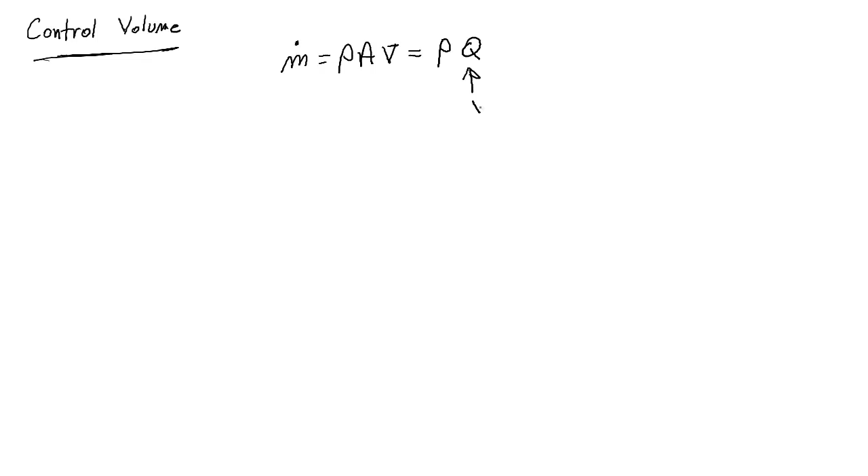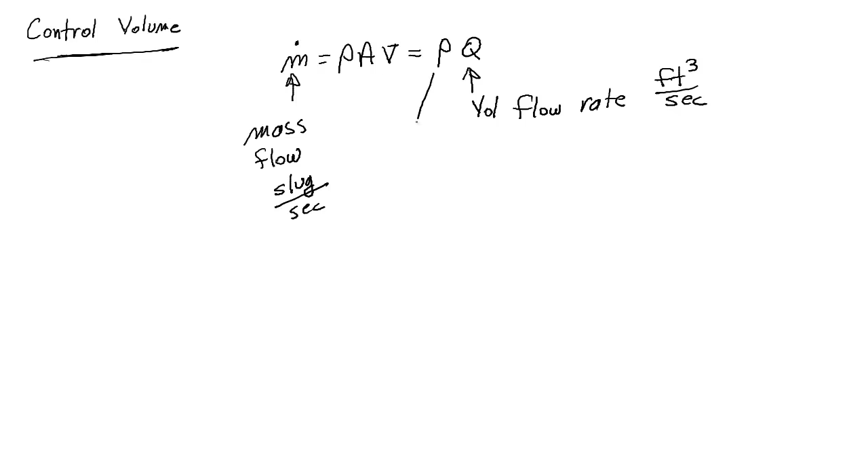So you've already become familiar with m dot is equal to rho AV or rho Q, where this is the volumetric flow rate in cubic feet per second or something of that nature. This is the mass flow rate, and in this particular case, it'd be slugs per second. And of course, this is the density that changes. It pretty much changes the cubic feet over into the slugs on this side.

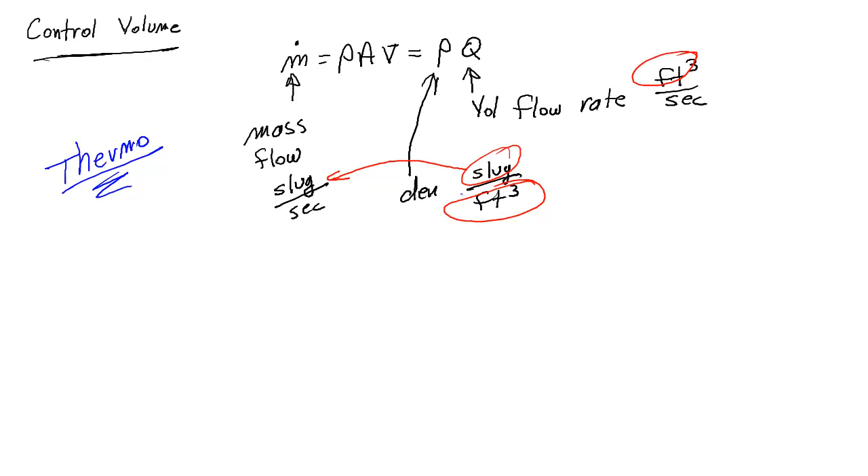You are familiar with this from thermo. And in thermo, you became familiar and you were introduced to this for a conservation. It was conservation of mass. So you were probably told mass in is equal to m dot in is equal to m dot out.

Now let's introduce it in a different way, and in this particular way, it's more mathematical. I'm going to write an equation down without deriving it, and then I'm going to give you some understanding of where it came from. I could go through the derivation, but that may not be as fruitful as trying to obtain a deeper understanding of it.

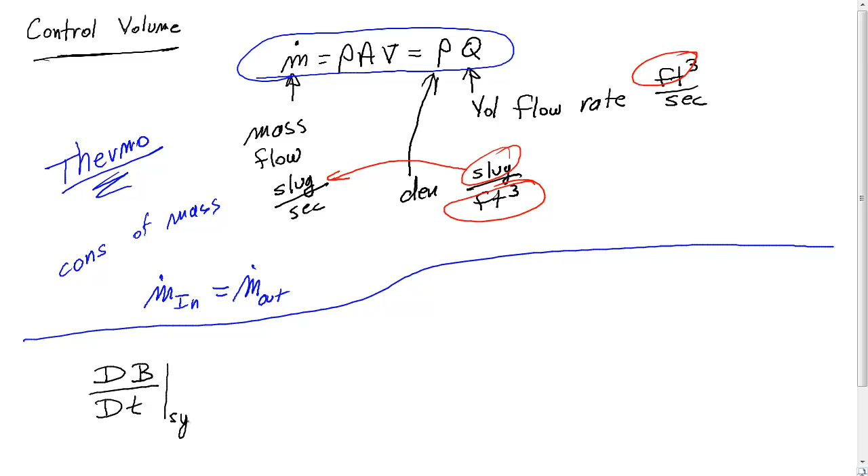Let's start this way. Okay, so let's say we have a particular quantity B, capital B, is equal to some type of quantity. In our case, the one we're going to do in the short term is the mass. And it's for a system. Now, a system is something along the lines of something where, in thermo you had a piston, and here was your system in here. What we're interested in is something different.

Okay, now this is the beta. This is actually the quantity per unit mass. And then we're going to do a closed loop around the entire control surface of rho times beta times the velocity. And it depends on the way you write this. Some textbooks write it like this, and some textbooks write it like this. But either way you do, these two are intimately tied together.

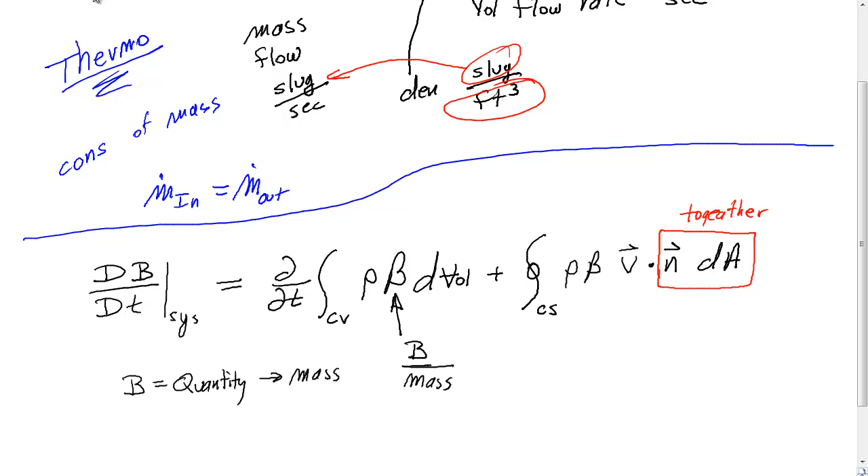Now, let's start by examining this equation. This is what commonly is called Reynolds transport theorem, and it is basically a transport of some quantity. In our case, it'll be mass, and then well, let's even forget for a moment that we're even dealing with mass. And these are the definitions.

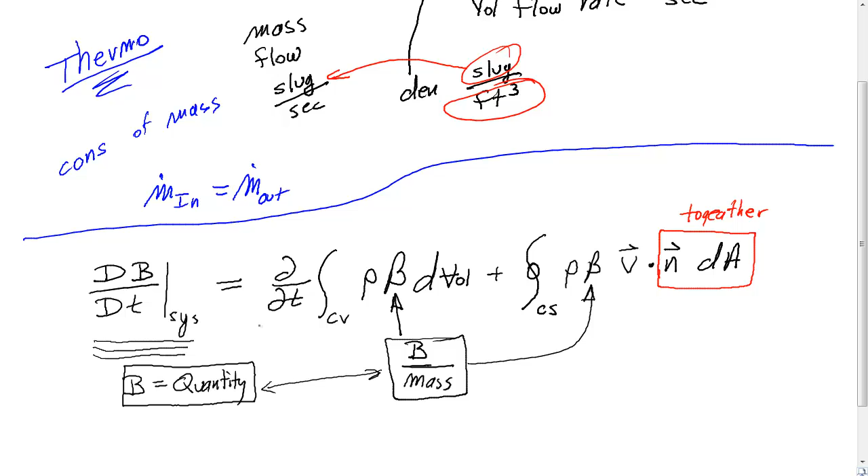This is the beta here, and so the Reynolds transport theorem states that time rate of change of some fixed system over here is equivalent to, let's stare at a particular location in the flow field and let's define a control volume, and these are the quantities through that.

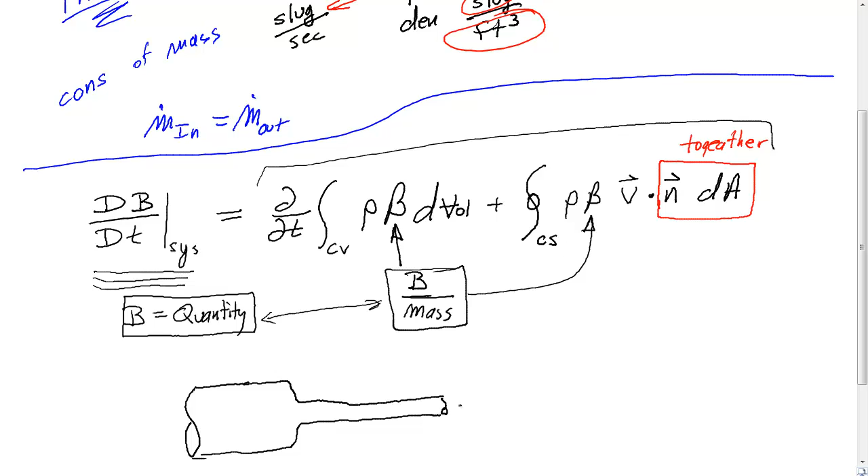Let me give you a typical example. This is probably the easiest example to come up with, and my handwriting is not steady, but that's okay. Let's say you have a particular pipe where you have flow out and flow in. You've decided to come up with what is essentially a control volume, and of course a volume has a surface.

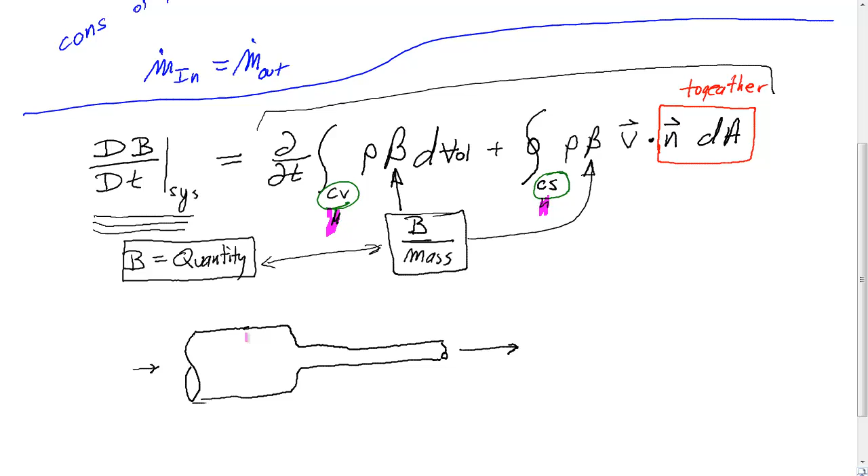So I'm going to let the green designate, or here I'll even do like this. The purple will designate the control volume. So here's the control volume I've decided. I'm going to come up. Now this is not something that you're going to saw across. This is something, or cut away from the diagram. It's something that's in your imagination.

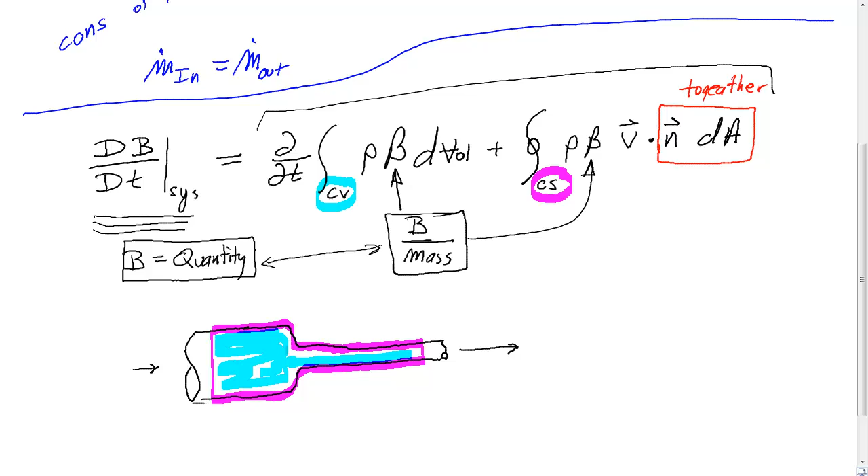You're going to stare inside of here. Let's even be a little bit more precise and say this is the control surface, and the light blue will be the volume. So I would have to color all the inside of here as being the volume. I'm not going to spend the time to make it perfect, but you get the concept.

Now, let's go specifically to our problem. We're looking at mass as being the thing we're interested in. So let's define our quantity B. It'll be M. So beta will be B divided by M, or in our case, it'll just simply be 1. So the Reynolds transport converted into our mass equation will look something like this.

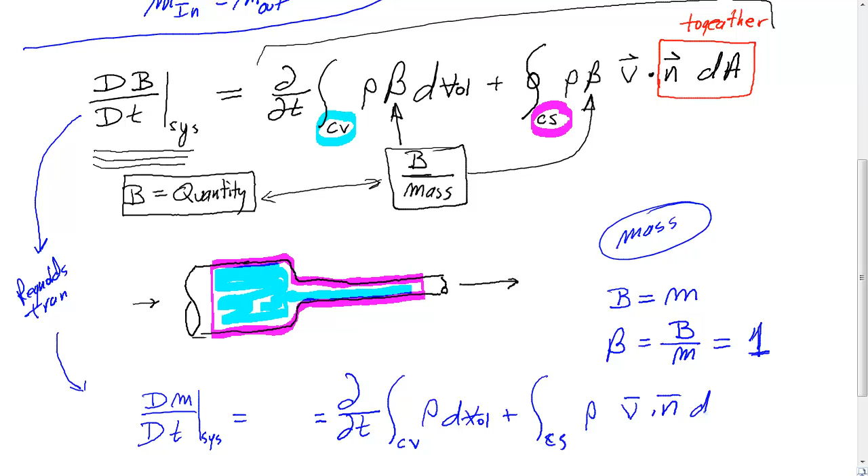dm dt for a system equals to, and I'm going to put another equals to right here because we'll come back to this, time rate of change of rho d volume, integral of the time rate of change of rho v dot n dA. Now these are both vectors, and we're going to deal with those, but in the short term, let's look at this one. This has to deal with our volume.

We're going to restrict ourselves to a condition in which the rho is equal to a constant.

Okay, if we do, we can pull this density out of this equation, and if it is a constant, we can pull it out in front of the differential, and what we'll be looking at is rho changing d volume. And if we're integrating on the volume, you could even go one step further and say,

What's the time rate of change of the volume? Now, if we've decided that our control volume should be fixed in shape and location, then this term by nature just becomes 0. And most of the time that's what you're generally wanting it to be, definitely fixed in shape. However, it may be able to move, as you'll later see.

So this term equals 0, and we're just going to write this term back down, and we're going to go back and address what shows up right here. What does show up right here?

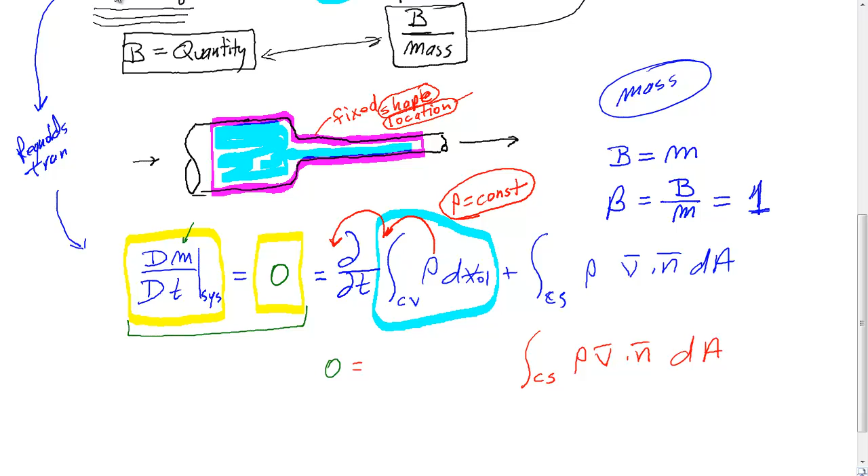We've already decided that we're going to have a constant density here, and we're left with this. So what does this mean? This is where we're going to take a look at the relationship between two things.

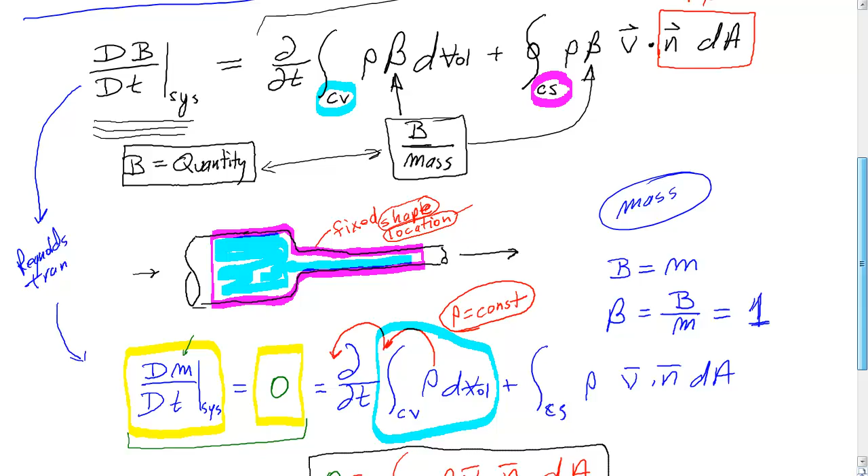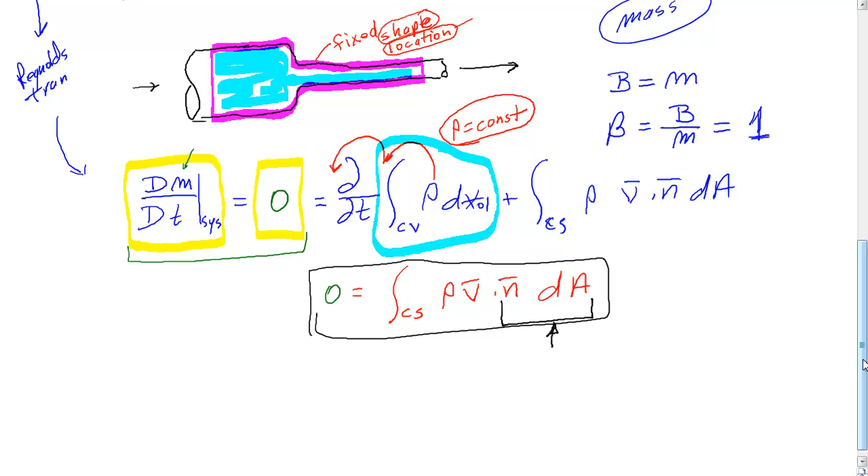We talked about this where these were together. Now I'm down to the point where I'm going to look really specifically at this before I look at anything else. Now, the normal is associated with the area.

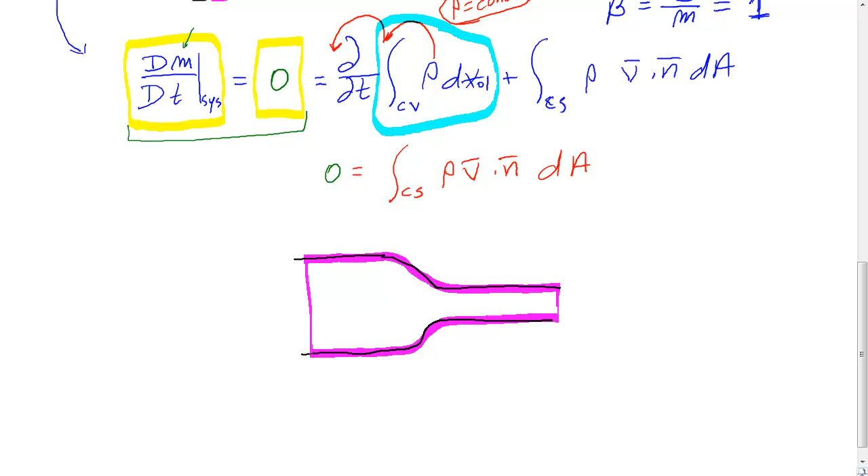Now I need to put my normals on it. If I were to put normals everywhere, here's what you would see. It would be much like a porcupine, and there are some restrictions here, and I'll spend a moment putting the vectors on there, and then I'll go in and tell you the restrictions. Let me put one right here, and I'll tell you what some of these restrictions are.

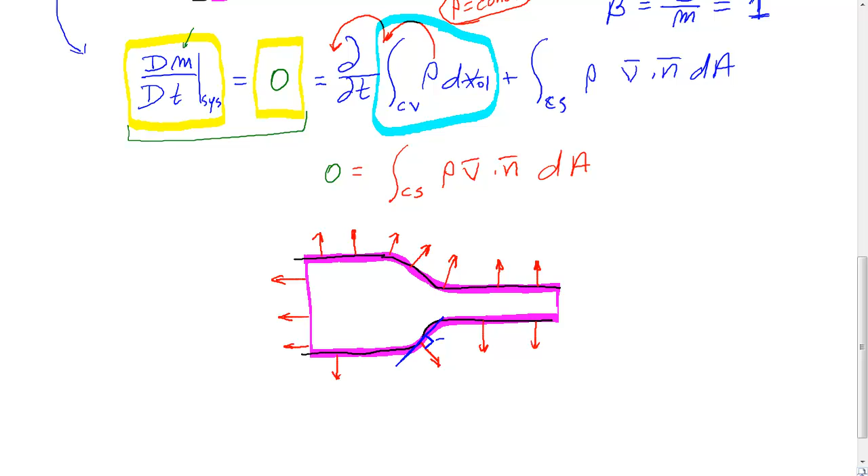If you look at a tangent to the surface, it's always perpendicular to the normal vector that sits there. Now, if you have a curved surface, that can become difficult. If you have a straight surface like the inlets and the exit, not a problem. But all along in here, this could be curved in any particular way. So let's take a look at this.

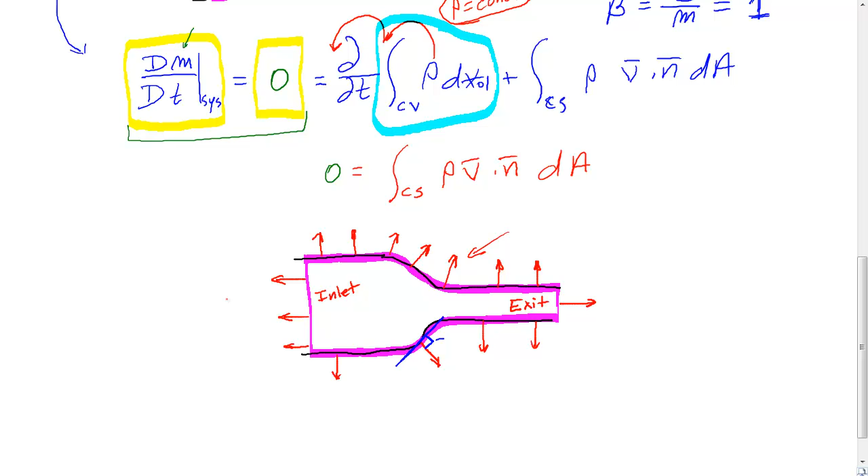I made it a little bigger here so we could take a look at some things. If you're looking at this and want to track the particles through here, let's pick one really close to the wall. It will go up, generally go up and around and through here. This particle will end up going up and out the exit in that particular direction.

So these are particle paths, and as you well know, at any point the tangent is the direction of the velocity. Now let's look at this one incrementally close to here.

This is a very small distance. So for this instant, these particles that are really close to the wall are in fact tangent to the wall. Now we talked a minute ago that these normal vectors are actually 90 degrees to the tangents.

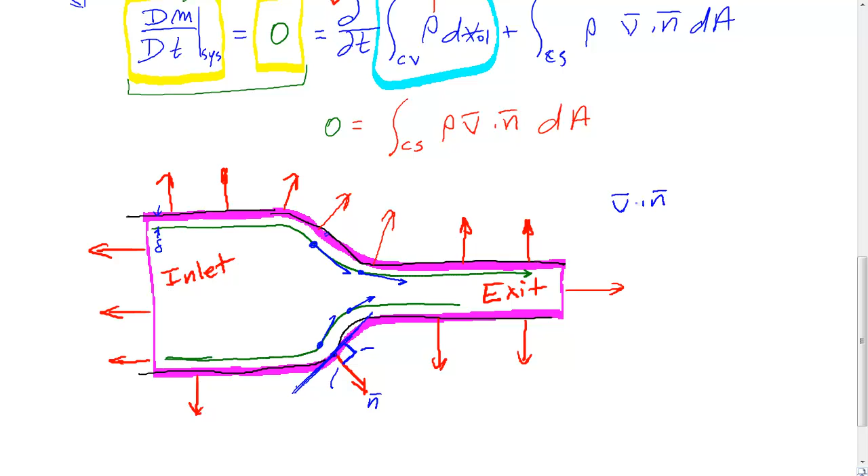So let's take a look at this term, v dot n. Just take any point, let's zoom in on it. Here is the wall right there. I've zoomed incrementally close, and here's the velocity vector. And here's the normal. Now, by definition, these things are 90 degrees to each other.

So remember this was the magnitude of the vectors times the cosine of the angle between them. For this case, by definition, the normal is always 1. If this were cosine of 90 degrees, that just gives you 0. And so v dot n here is 0.

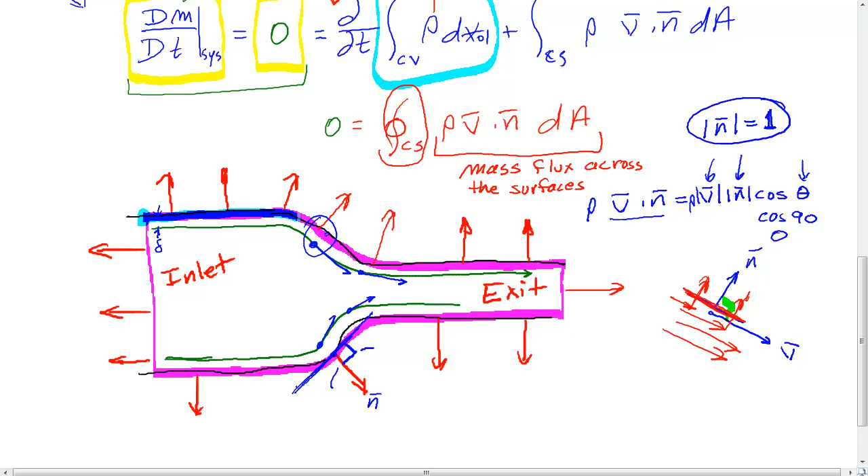So essentially what this is saying is I want to know the mass flux across the surfaces, and that's why you're integrating over the whole surface. Now this is supposed to be a path integral, so you're supposed to start somewhere, say back here, and run yourself around, integrating around the entire surface. Technically you have to go in a particular direction, but that's what you're doing - integrating around the entire surface.

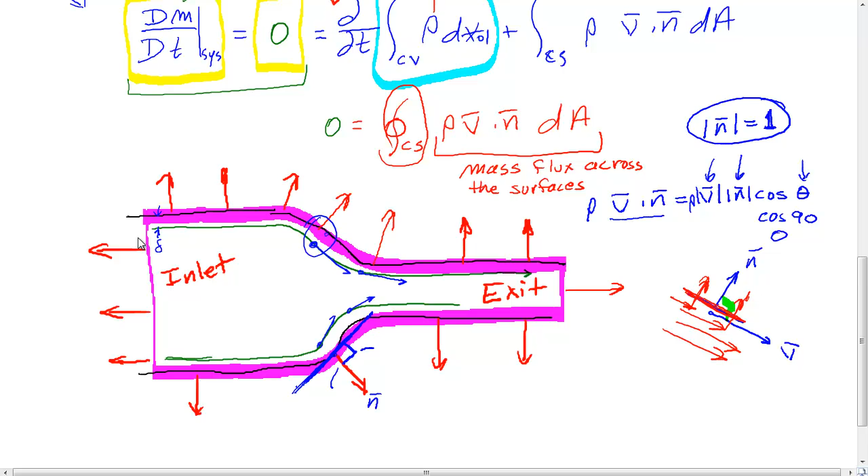This will end up as exactly the same thing we came up with before. Let me show you that. We start over here, and if you're looking at the surfaces associated with the pipe wall, what would you say the mass flux across those is?

Mass flux across the wall is nothing more than 0. So if you were to integrate along where I drew these yellow lines, you would get 0, because everywhere the velocity is tangent and the normal is perpendicular to this tangent. The only place that doesn't occur is right here - you have Vn, and right here you have VE for exit.

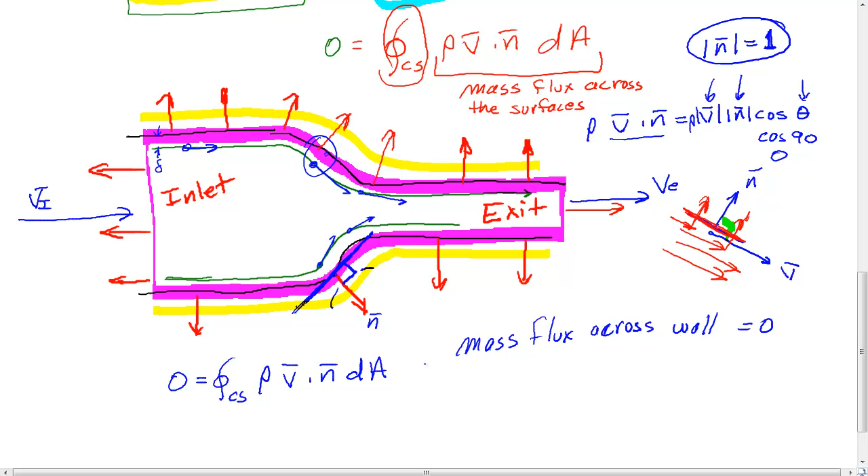Now let's look at the VI. Go up and take a look at the equation. You realize it's nothing more than velocity inlet, rho inlet, velocity inlet - that's a vector - dotted with the normal, I'll put i there, area inlet. This is under the assumption that these terms do not vary across this interface. If that's the case, they can be pulled out in front, and you end up with this term.

We're going to take a close look at this in a second, but let's include the exit as well. Rho of the exit, velocity of the exit, still a vector, has to be dotted with its own normal, and then area of the exit. Let me put this in parentheses as well.

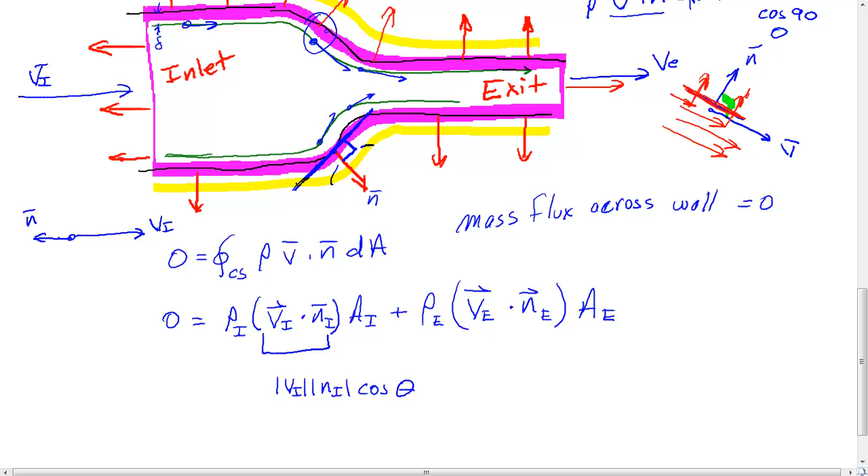Now let's look at this particular term. It's nothing more than velocity inlet magnitude, normal inlet magnitude, cosine of the angle between them. It just so happens that you have one vector going in one direction and another going in the other, and that's 180 degrees. Cosine of 180 degrees is nothing more than -1. So what that tells you is rho inlet - and this is equal to 1 - so this is basically velocity inlet magnitude, times -1, times area of the inlet.

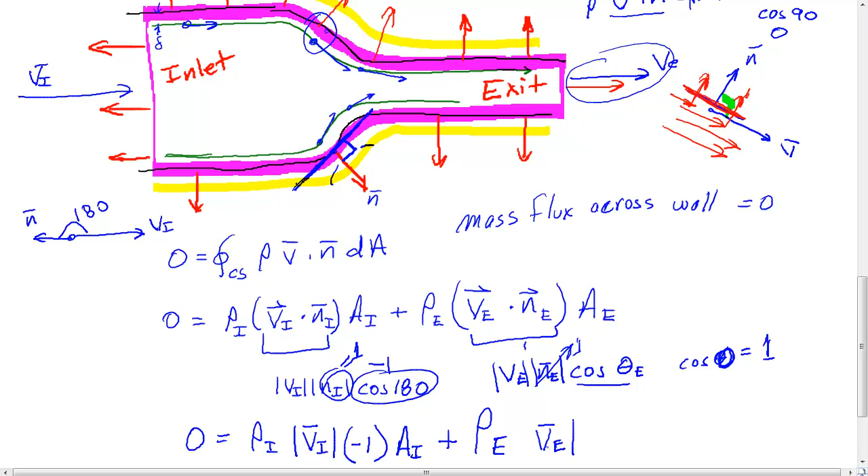Now if you look at the exit, velocity of the exit, normal of the exit - by definition the magnitude of the normal is 1. Now these two vectors are going in exactly the same direction, cosine of 0 equals 1. So what you get here is velocity of the exit magnitude times area of the exit.

Not too surprisingly, what you end up with in the final equation is rho inlet, with the minus sign, plus rho E VE AE, where it's implied this has turned into the scalar magnitude. So what you get, rho V area - I made a mistake there - is equal to rho exit V exit area exit, something you knew before.

Your question might be, why in the world would anyone introduce something that offers more complexity and yet a little less understanding? This approach would definitely give you the concept that you may introduce errors in your calculations by taking this approach a little differently than before. Here's why this works and why you're introduced to it.

Let's take a look at Reynolds transport. Reynolds transport says dB/dt for a system is equal to the time rate of change of the control volume, rho beta dV, plus the integral over the control surface of rho beta v dot n dA.

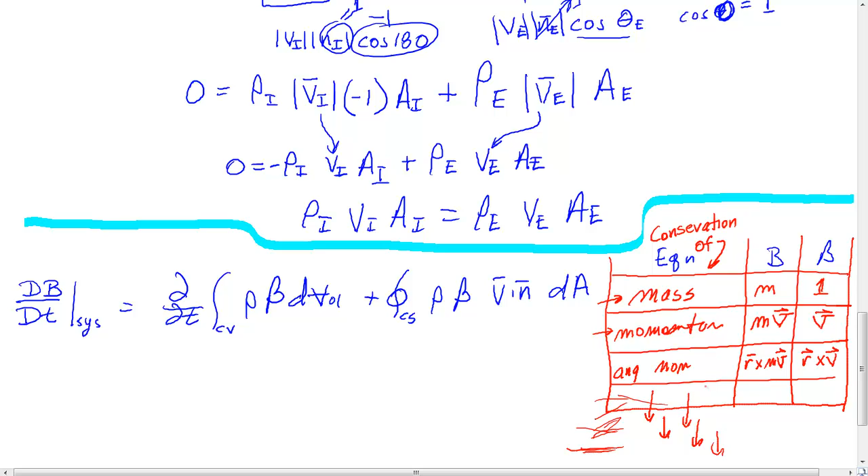There is one other term we might want to carry, and that is angular or rotational momentum, which would be r crossed with v -- r cross v. These I should have drawn as vectors. There are other ones too that you can continue to add, like conservation of chemical species, of reactions, of all sorts of things, but ours will be confined to these particular three.

So if I were to specifically look at momentum, what would I see? I would see d(mv)/dt for a system. What is that? If you look at what a lot of people say, they could turn this into ma, where it's a vector. The more rigorous form is this, but you're used to seeing this -- sum of the forces.

So if that's the case, you can write the momentum equation like this: sum of the forces equal to, grabbing the right hand side from before, the time rate of change over the control volume of rho v (vector) dV, plus the integral over the control surface of rho v v dot n dA. Now let's take a look at our example, our case from before.

It's a fairly easy case. I'll draw it again -- I've been drawing it so many times, but now we're getting the handle of this. Here's our control volume, here's our normal, I'll call it N1 and N2, and here's our velocity V1 and V2. Those should have been vectors as well.

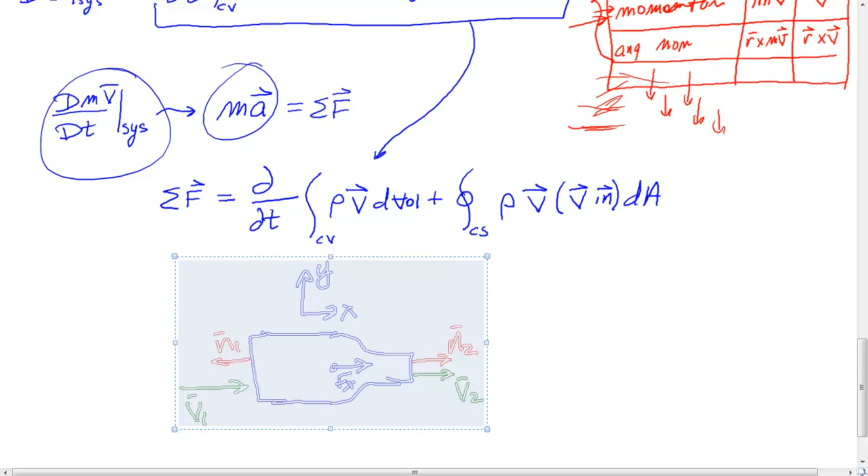Let me erase this and move it over here. Let's increase its size a little bit because I'm going to start drawing things on it. For that matter, maybe I better do it a little differently. Here's what I'm going to do -- I'm going to copy it right there.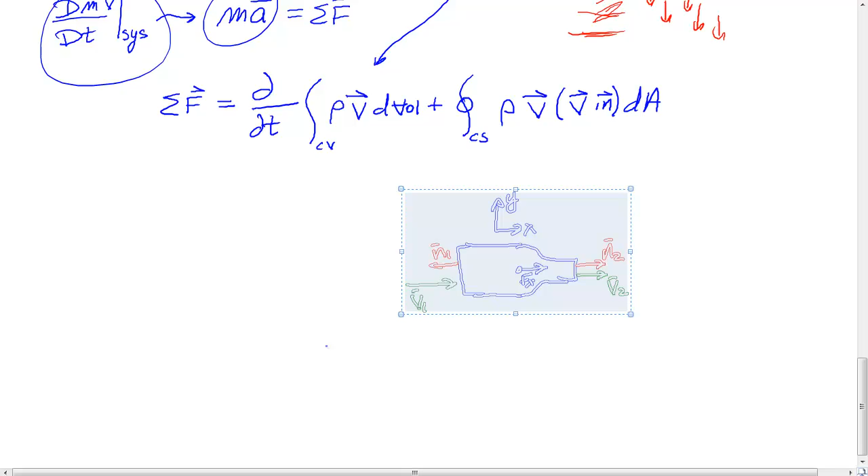Okay, let me pause this and work. Okay, I finally got it. I've got a duplicate drawing here.

Now, the reason I did this, you'll see in a minute. I'll put an equal sign here to mimic that equal sign. Now, this means that my drawing needs to be reworked. Okay, now here's how I'm going to rework it.

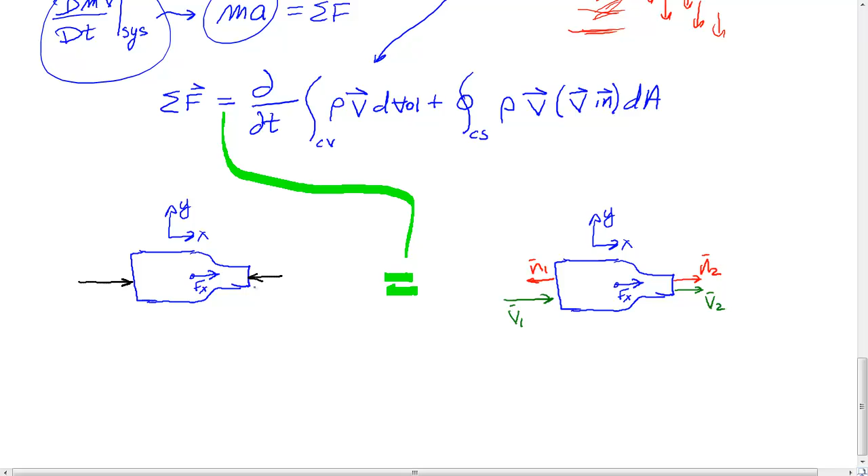I'm going to go ahead and take all these off this side. Then I'm going to come over here and say I've got some forces here. So here I'm going to say I got P1A1, P2A2. Now, there are two types of forces that you have on a body.

You have generally surface forces and body forces. Now, let's really investigate this situation over here before we go on. Which one of these is surface and which one of these is body forces?

Now, at first you may make the mistaken assumption that that is a body force. That is not a body force. Let me tell you why. Let's investigate this, okay? If you've got the steel jacket, let's draw the steel jacket here, or plastic, PVC, whatever.

What is happening here is you've got fluid particles coming in here and turning right here and going on out. So all of these except that center streamline are turning.

This means that since this thing turned, let's just take this path out there by itself. It did like this. So here's this path redrawn here. In order for it to turn, something had to force it to go in that particular direction.

So this means along this surface, which is all we're interested in, we're only interested in this internal part right here. Here's what I mean. This portion right in here. That's all we're interested in.

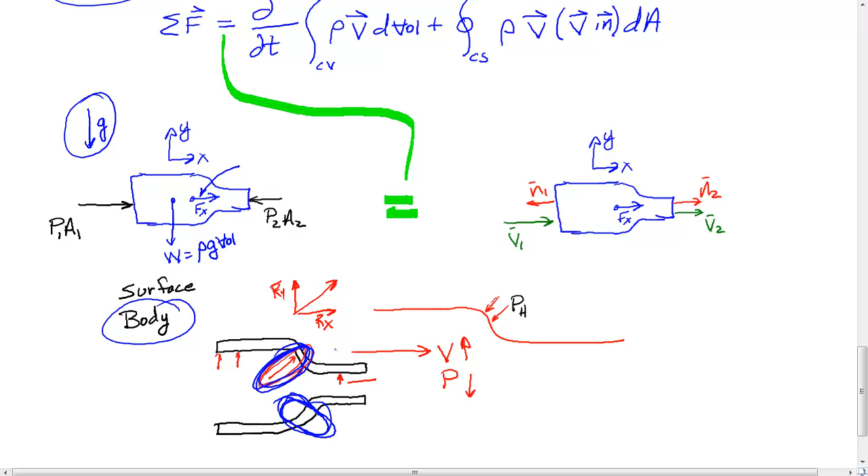So again, this force is a result of the pressure on the shoulder of the pipe or reducer or whatever.

So with that in mind, that gives you an idea of where each of these forces came from. And now we're going to go on and work on this.

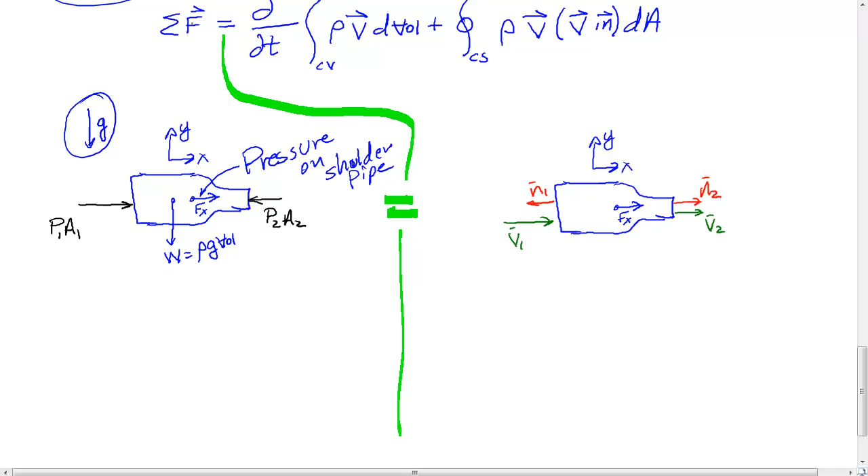And you'll see why I put these apart like this. Let me go down here and draw a delineating line here, and let's just work on the left end. Some of the forces: I've got P1A1 minus P2A2 plus Fx.

Now, I could include this, but in the x component it has no value. The inevitable question might be, and I've had this question before, is why do you have these both showing, drawing into the surface? Why didn't you have one coming in this particular direction, for example? The answer to that is associated with working with gauge pressure.

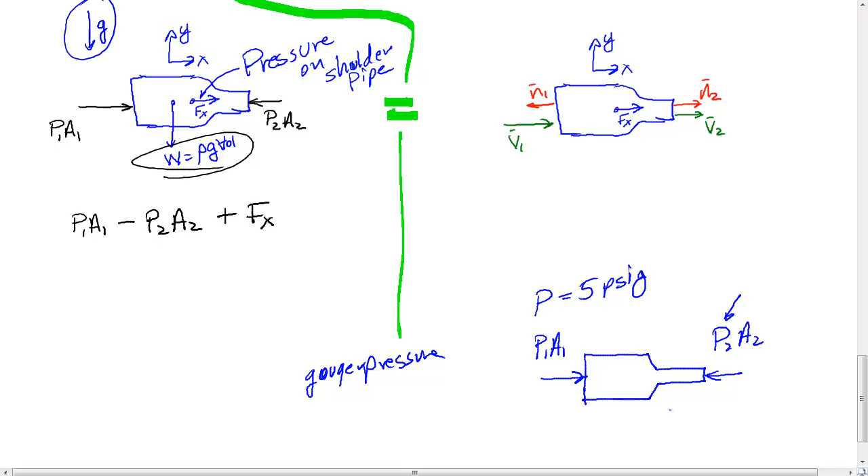If you have an object, and say you drew them always in, and you had P1A1 where pressure here was, say, 5 psi gauge, and let's say P2A2, instead of this it drew a vacuum. You remember the pipe where you were trying to draw the soap up into the container, so this P2 could be minus, say, 5 psi gauge.

If you did this in this particular direction, the vector went in this way, then by putting a minus 5 times whatever your area is, you're flipping the vector around. So if you write your vectors always going in like this, then by using gauge pressure you're always taking care of the situation. If it becomes a vacuum, it flips this vector around. So I always take the easy route, and I always draw the vectors in so that any vacuum would be taken care of.

So here's my left hand side. What's my right hand side? Now I can put a big long equal sign over here, and we can make the same argument that this term doesn't appear. Now I've got to take care of a few extra components.

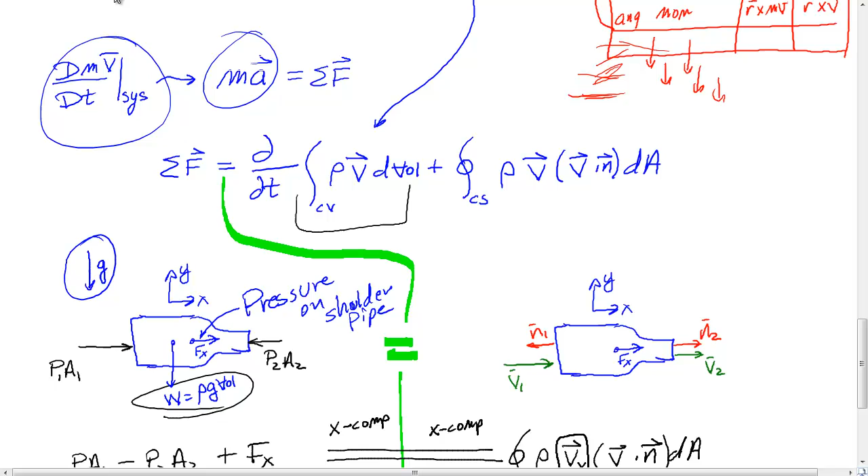The right-hand side has to be the x component as well, which means that if I took this equation, took off this top, took off that, it would have to be x, and take off this one. So the vector components come from the v's, or if I wanted them to be the y component, I would have that way. Now this is very important: this is a vector equation, so technically in a three-dimensional sense there are actually 3 equations here.

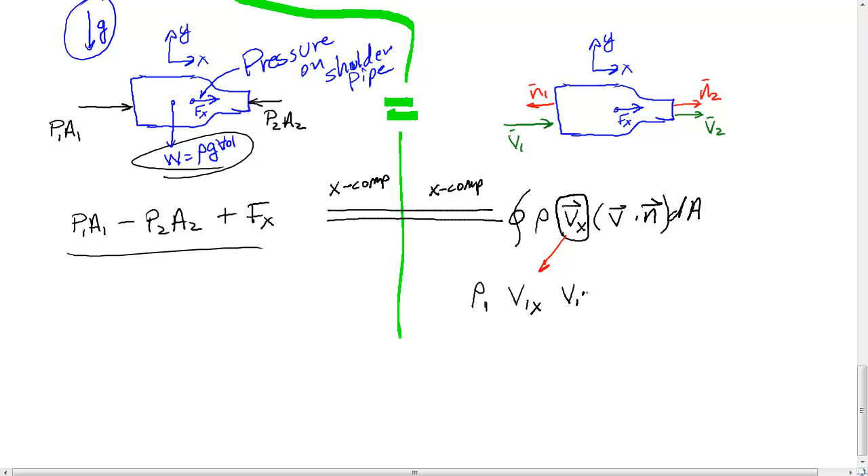More often than not we'll be just dealing with 2 equations, but I have to be very specific here. The V1 x component, V1 dotted with N1 times area 1, plus rho 2 V2 x component times V2 N2 and area 2. Now, it just so happens that...

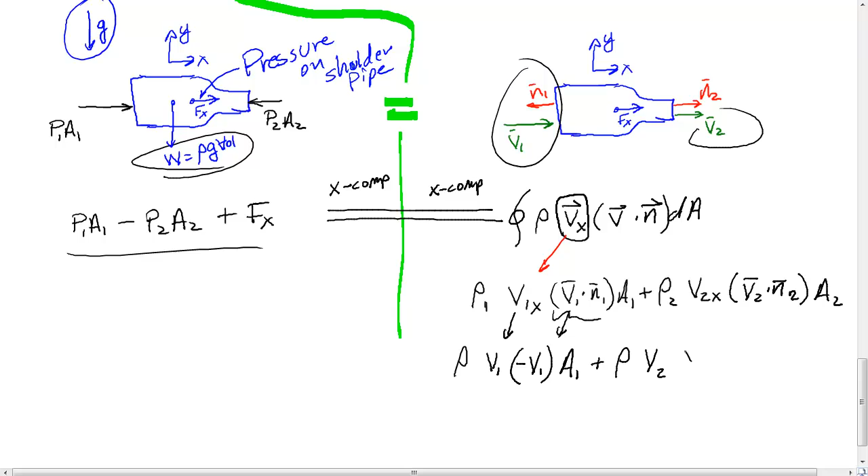The rhos are the same, so what you end up with is the V1x is nothing more than all V1. This becomes a minus V1 because the dot product, they are both going in opposite directions, times A1, plus rho. Since this is going in the positive direction, it's just V2, times V2 again, then A2 — they're both going together. So the logic is different for each of these, and I'll show you a case in which things are not as straightforward.

And so your equation looks just like that: P1A1 minus P2A2 plus Fx, your eventual goal is to actually find Fx. Fx is equal to P2A2 minus P1A1 plus rho V2 squared A minus rho V1 squared A, and that's it. Now you might want to put in your values if you had one.

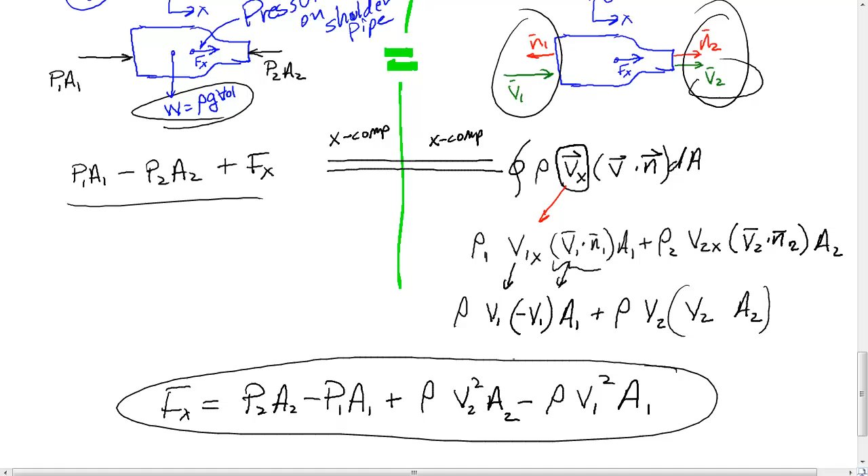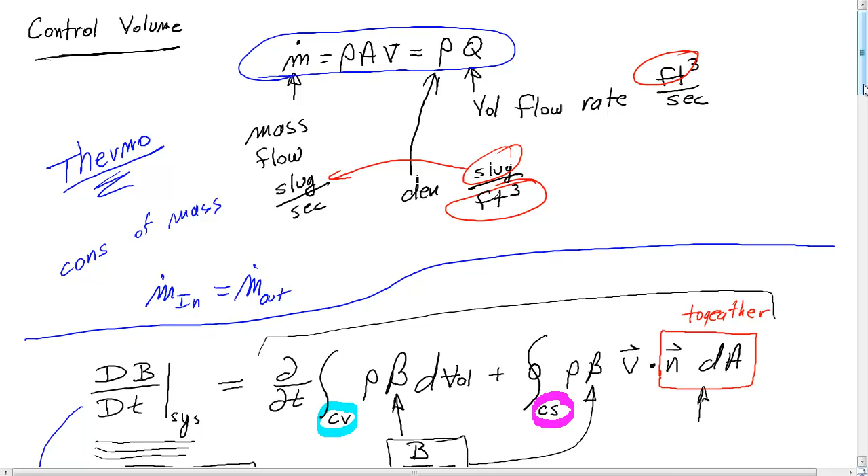So conceptually, what you see here is, let's review: we started with this concept that you already knew. We moved on to an introduction of Reynolds transport. Now, I didn't go to prove it — you can go to any textbooks you want to see how they derive it. But what you deal with is a description of some phenomena you already had, change in mass with respect to time, change of MV, something like that, and you deal with a control volume and a control surface on the other end.

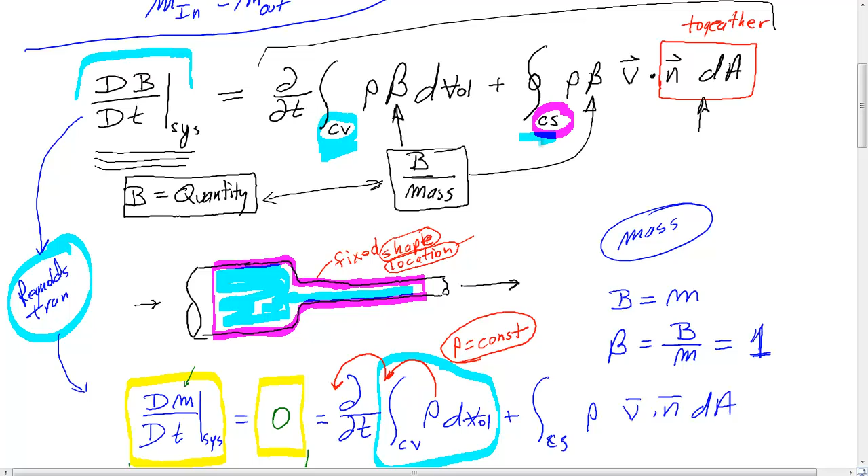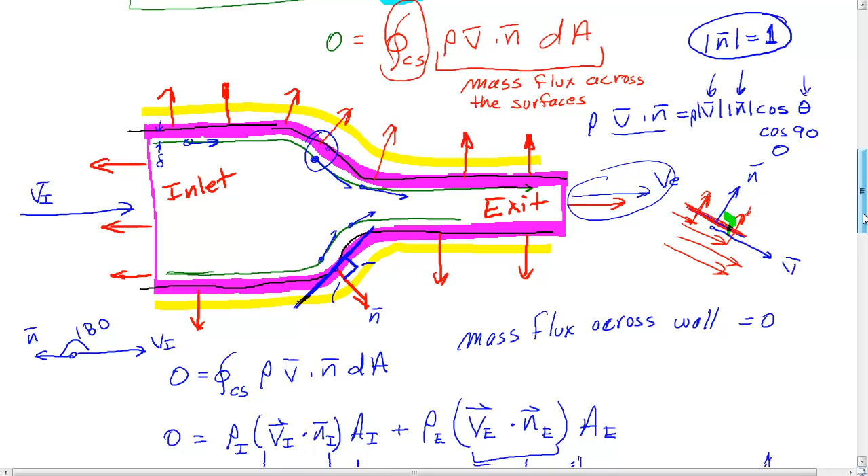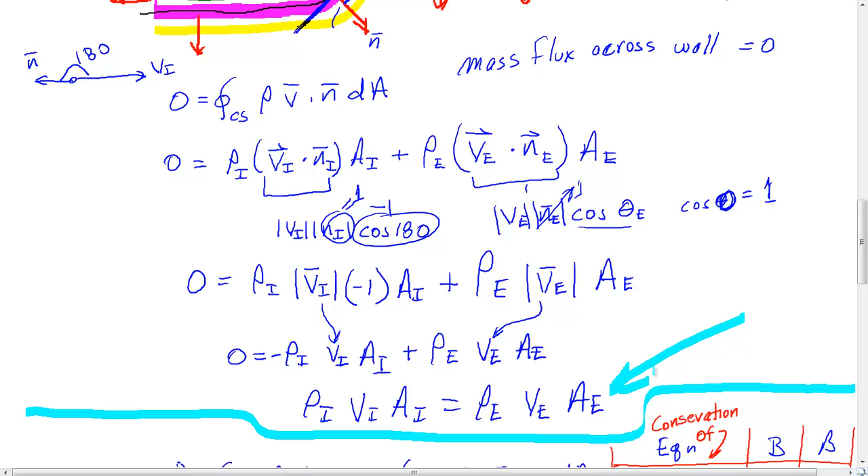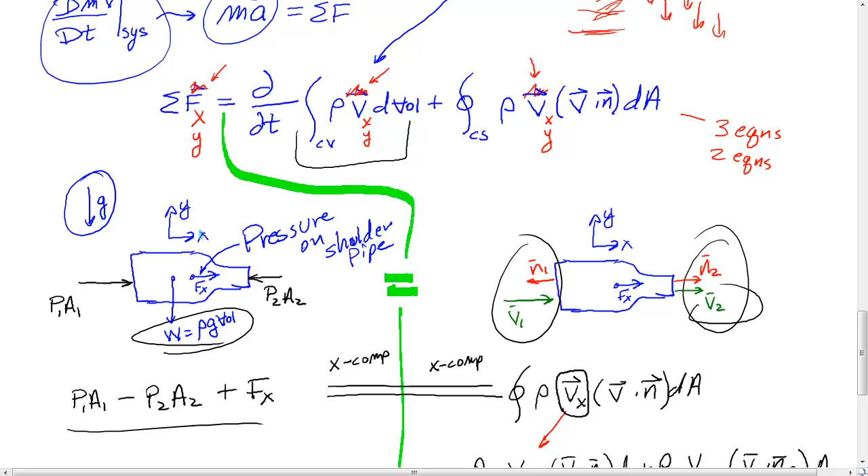We went through and defined each of our terms and started looking at normal vectors and how you actually implement this in continuity. And when you get all done, you get exactly the same equation you would get back in thermo. At this point, you were probably questioning why you would do something this crazy. Then we moved on into conservation of momentum, and we went down to the point where we can find the force applied to, like, some fire hose if we had enough information, like the velocity and the pressures at the ends.

Now we're going to go into something a little bit more complicated, but since we've already gone 40 minutes on this video, I'm going to postpone it for the next video.